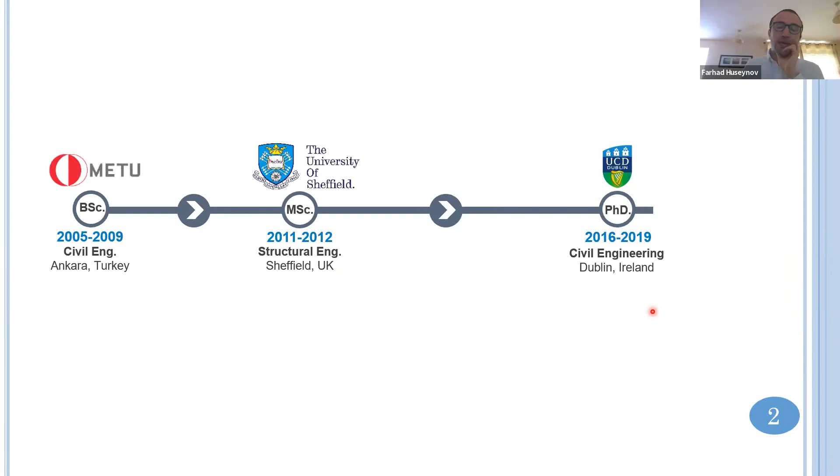I did research on bridge SHM under the supervision of Professor Eugene O'Brien. While doing my PhD at UCD, I was also working for a small university spin-out company named Full Scale Dynamics in Exeter, UK. FSDL is owned by three professors from the University of Exeter: James Brownjohn, Paul Reynolds, and Alex Pavic, and it's specialized in testing, monitoring and assessment of large full-scale structures.

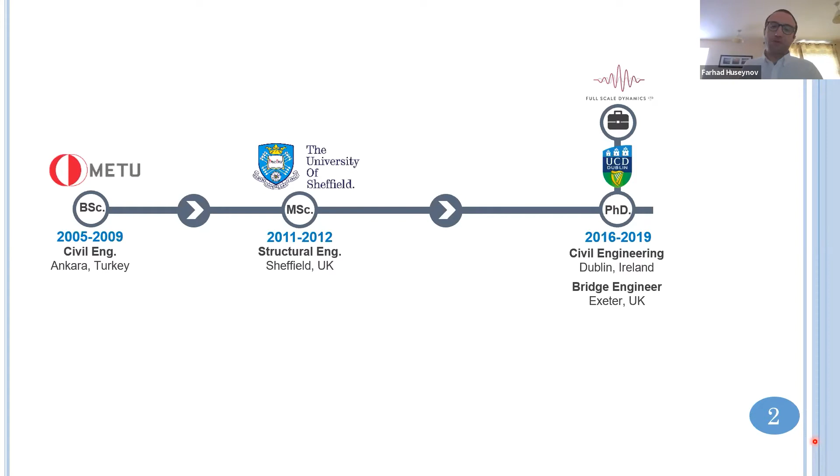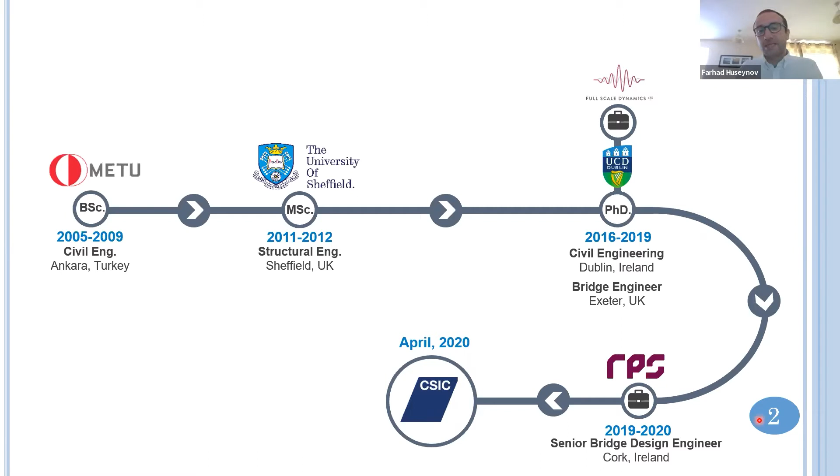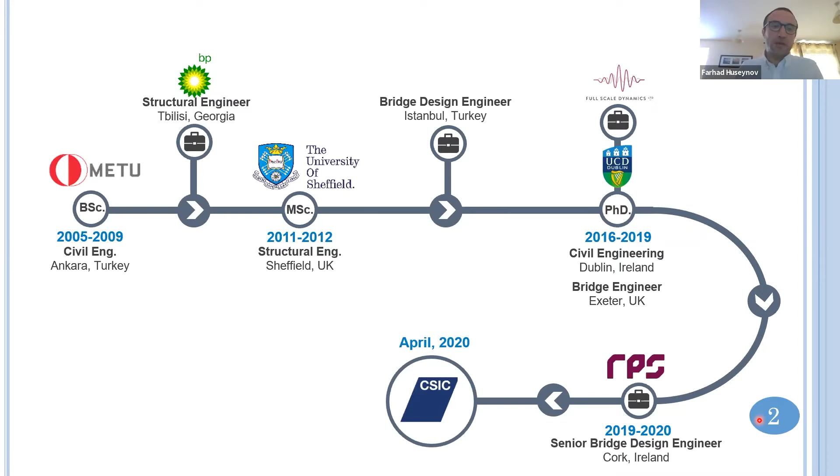The emphasis of my role was basically to carry out field tests on bridges in the UK and in Ireland. Before joining CSIC, I was working for a consultancy company named RPS as a senior bridge design engineer in Cork. Previously I worked for several engineering companies as a design engineer in Georgia and in Turkey. Overall, I have 8 years of experience in design, testing, and assessment of bridges.

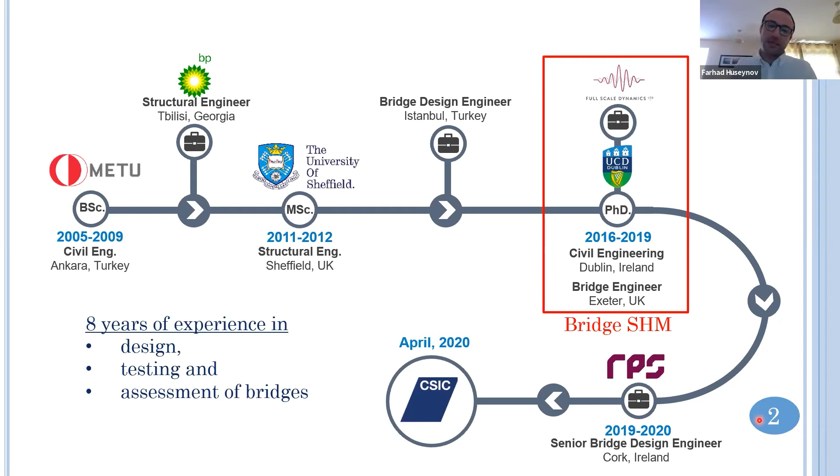Today I would like to talk about my bridge SHM experience through my PhD studies and during my employment at FSDL.

First, some background information on my PhD research area, and I would like to discuss its primary objective. I conducted research on bridge SHM methods.

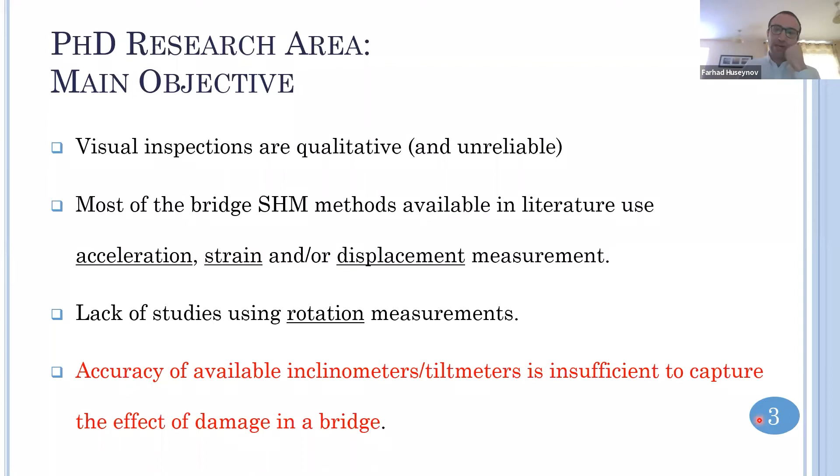Most of the bridge structural health monitoring techniques available in literature use either acceleration, strain, or displacement measurements to assess the condition of a bridge. There's a lack of study using rotation measurements, because the accuracy of commercially available inclinometers is not good enough to capture the effect of damage in a bridge, which was the main motivation behind my research area. So I started working on bridge condition assessment methods using rotation measurements under the supervision of Professor Eugene O'Brien.

To give some background theory on the research area I worked on during my PhD: it's based on elastic beam theory. The change in slope between any two points on the elastic curve equals the area under the curvature diagram, or M/EI diagram, between these points.

So in theory, when damage occurs anywhere on the bridge, a rotation sensor should be able to capture its effect. But the main research question I was working on is whether it will be possible to separate the effect of damage from the entire rotation signal. And if so, is it possible to measure the tiny rotations occurring on a bridge? And what's the required accuracy to detect the effect of damage on the bridge?

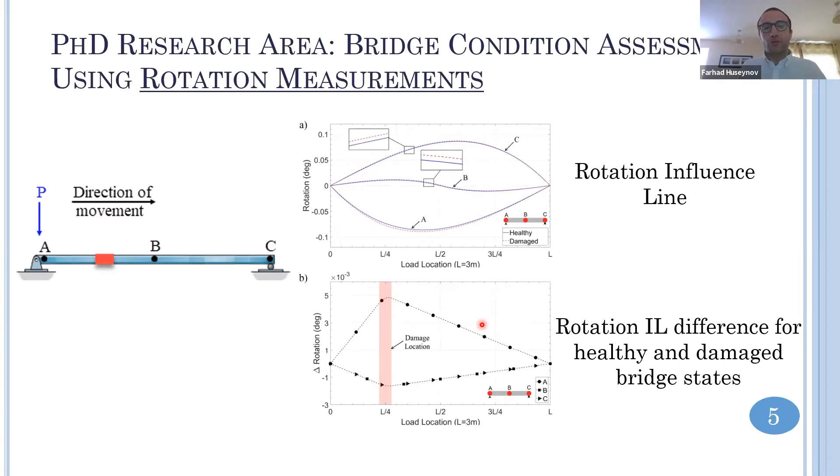The solid blue line represents the healthy state, and the dashed lines correspond to the damaged state. The difference between the rotation influence lines is provided in the bottom plot. As can be seen, the peak occurs at the location where the point load is at the damage location, and this comes from the curvature plot. As the load gets closer to the damage location, the effect of damage becomes more visible.

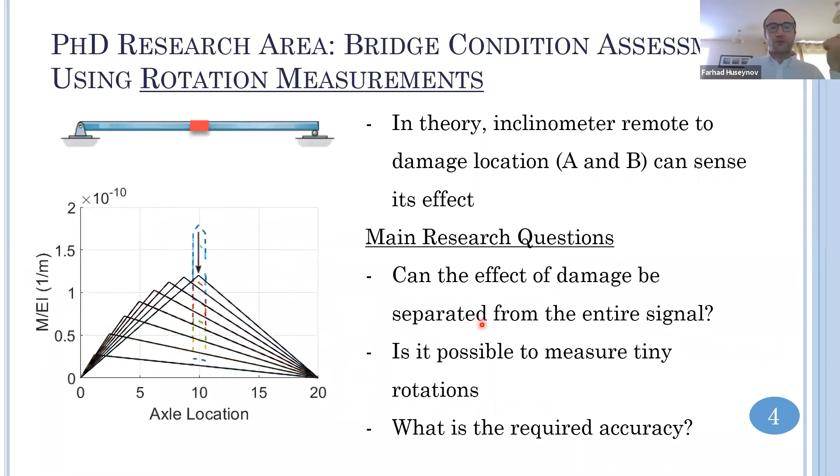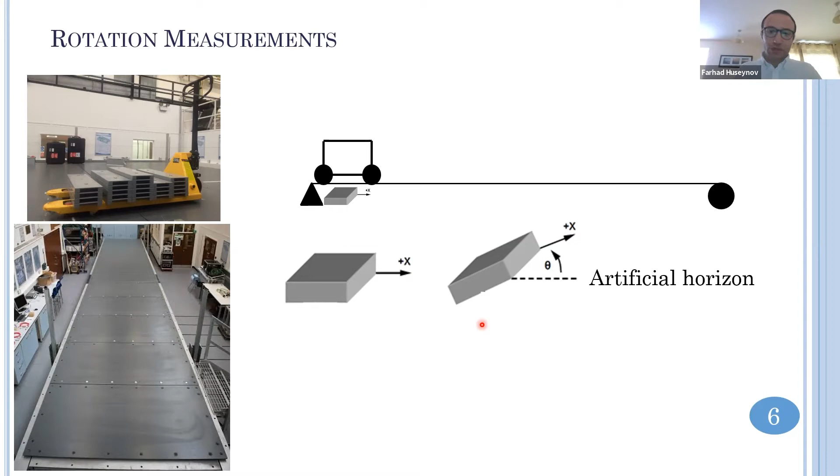The most challenging part of my PhD research was to get accurate rotation measurements. The main operating principle of an inclinometer is to measure the angular rotation of a test specimen with respect to an artificial horizon. In my research, I used accelerometers that sense gravity, the natural reference for the horizon, to measure rotation.

The output of an accelerometer obeys a sinusoidal relationship. When placed horizontally, it measures 0g. As it's rotated 360 degrees, if it points upwards it measures 1g, back to 0g, then minus g, and then back to 0g again.

In theory, the inverse sine function of the acceleration output should give rotation in radians. That's basically what I tried to test on a laboratory bridge at Exeter University, where I loaded the bridge with 500 kilograms using a trolley.

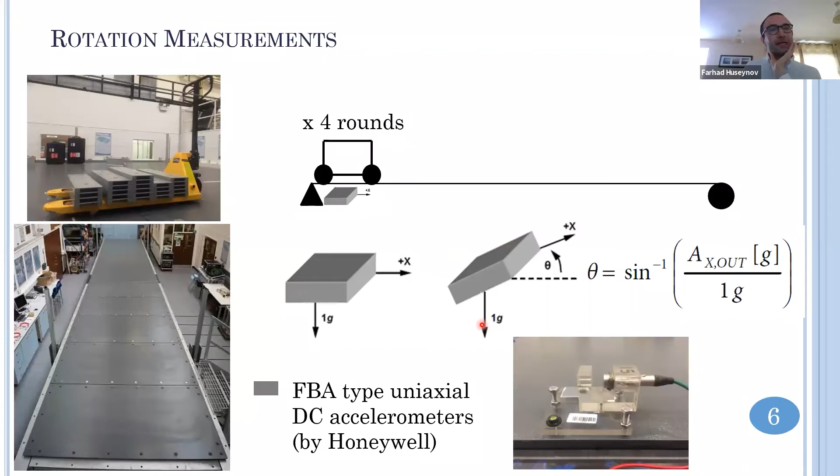I pushed the trolley along the bridge four times, and the next plot shows the raw horizontal acceleration signal I obtained during the test. I forgot to mention that I placed the accelerometers in the horizontal direction.

The raw acceleration signal has a high frequency component, which I later found out is due to the longitudinal movement of the deck from flexural bending. As the deck bends, it shortens and elongates, so the accelerometer senses that horizontal acceleration. I developed signal processing techniques to remove that high frequency content from the total response, and the final result, shown in the bottom plot, is the rotation.

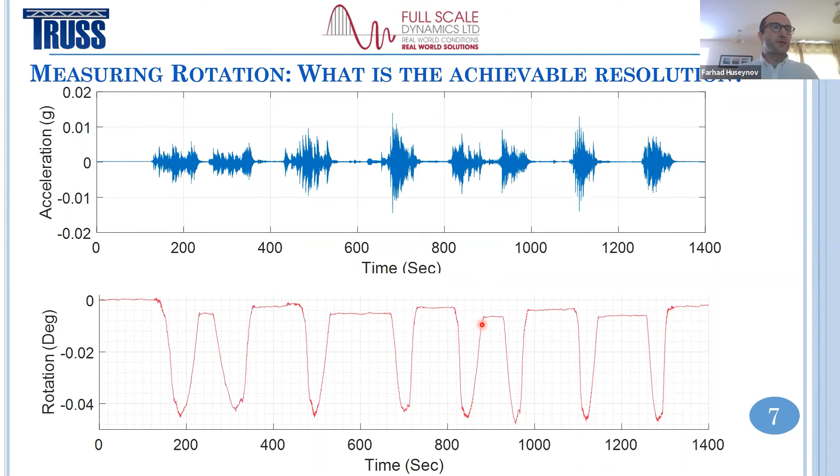This is how I measured the rotation response of a bridge to a moving trolley.

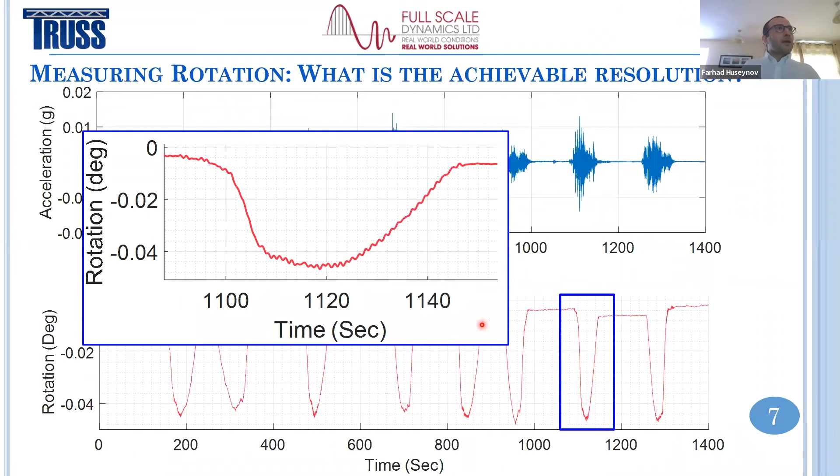The first case study I'd like to present - the main purpose was to test the damage detection methodology I developed throughout my PhD studies. I developed it through numerical studies, and tested the methodology in a laboratory at Exeter University as a final validation.

I got a chance to test the proposed bridge damage detection methodology on a real bridge owned by West Somerset Railway. Through FSDL, full-scale dynamics, I did numerous field tests on their bridges, which helped me build a strong relationship with the bridge owner, and as a result he allowed me to test the methodology on the bridge.

It's a relatively simple bridge, actually the most simplistic bridge I've ever come across. It consists of two main girders, and it doesn't have any railway ballast or concrete deck. The railway lines sit directly on top of the main girders.

The conventional trains running on the West Somerset Railway, since it's a heritage railway, are steam trains. There should be a video image showing a steam train crossing over the bridge.

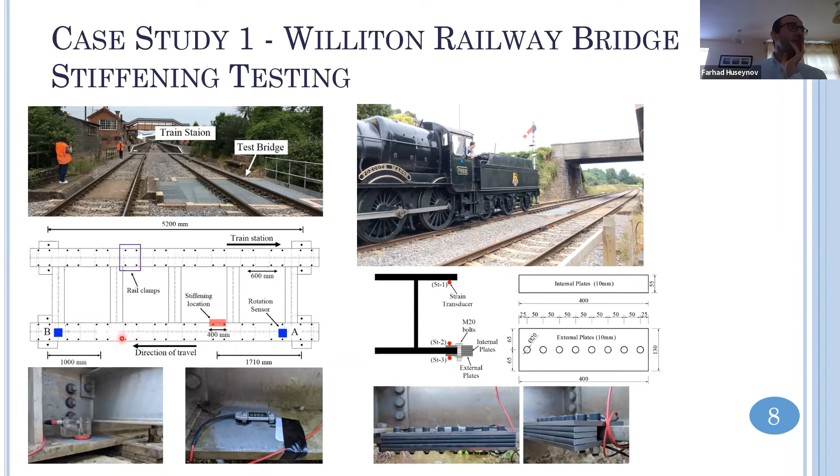I stiffened the bridge using steel plates, clamped at the bottom flange of the main girders using high tension grip bolts, and placed strain sensors on the main girder flanges and on the top and bottom of the steel plates to test if the stiffening application was effective. At the same time, I instrumented the bridge with accelerometers to measure rotation.

During the test, I asked the train operator to stop on the bridge to test if the stiffening application was effective. It shows the Raveningham Hall steam locomotive remaining stationary on the bridge, where we recorded strain at 3 locations. The aim was to see if full shear transfer is provided between the stiffening plates and the main girder, and to see if we will be able to get a nice linear strain distribution along the depth of the section, which is quite linear, and it worked.

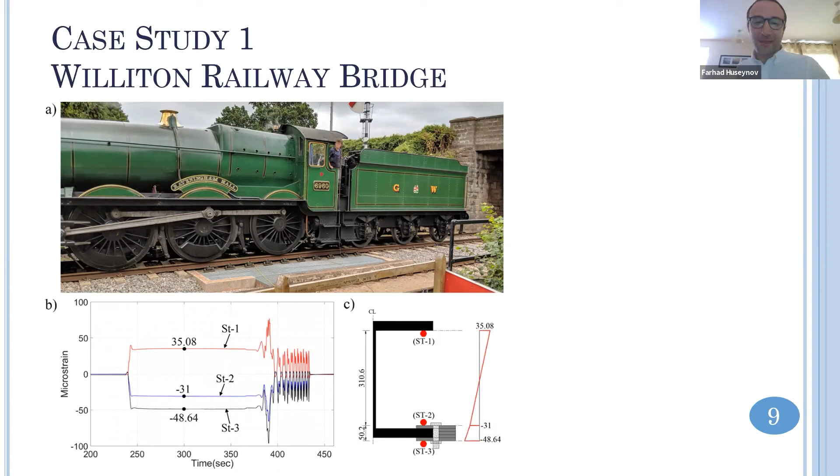I was very pleased seeing the stiffening application worked. Otherwise, if the plate slipped during the train loading, I would probably have a bigger problem than trying to finish my PhD, as the main girders have galvanized coating. I was lucky enough that there wasn't any issue, there wasn't any damage actually caused to the bridge.

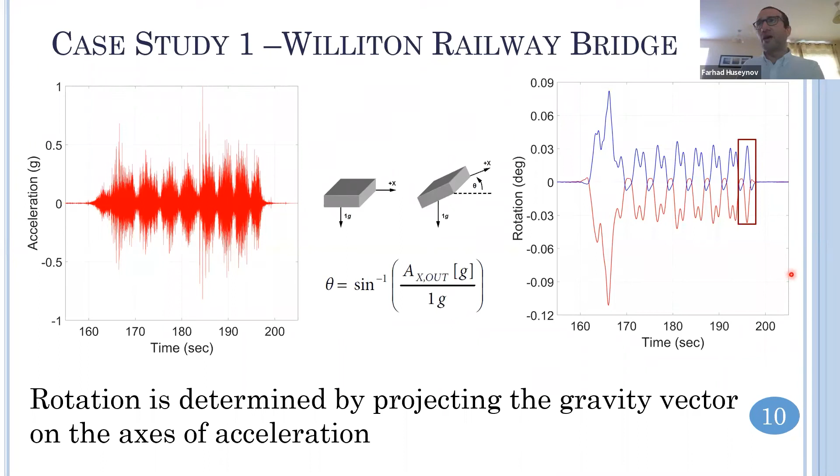There are some techniques available in literature to separate the contribution of each axle from the total response that I used throughout my PhD. The one that I used was developed by Professor Eugene O'Brien.

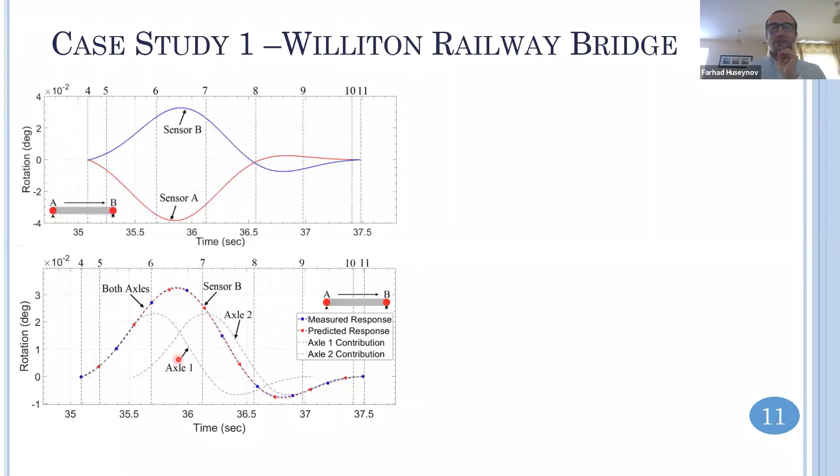The figure on the bottom shows the total response from one sensor to a moving bogie, and this dashed grey line shows the contribution of each axle. Since the weight distribution in a bogie is evenly distributed, the contribution of each axle is the same.

I did this for healthy and stiffened bridge cases. The continuous line shows the measurements obtained for the reference bridge state, which is the healthy, assumed to be healthy state, and the dashed red lines correspond with the stiffened bridge case.

Since in this bridge the rail tracks lay on top of the main girders, we noticed that the sensors start picking up the rotations way before the axles arrive at the support location. That's why the influence line of the bridge is much longer than the bridge itself.

The difference between the rotation influence lines obtained from sensor A is provided in the bottom right plot, where it shows this nice triangular shape which corresponds with the stiffening location, basically showing that the damage detection methodology worked on a real bridge.

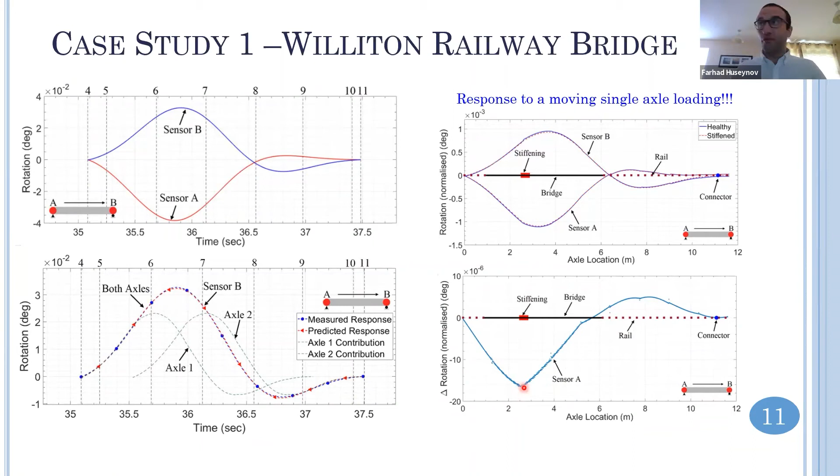The second case study that I would like to present was conducted again on one of these West Somerset Railway bridges. It's a simply supported railway bridge. The structural configuration is slightly similar to one of the Staffordshire bridges, where it has a high skew and consists of two main girders. The only difference is that this bridge is quite historical. It's built in the 1870s, so the main girder is made of wrought iron.

The purpose of the test was that West Somerset Railway approached FSTL in summer 2017. They were hosting this famous locomotive, Flying Scotsman, which is heavier than the conventional train running on their line. This mineral line railway bridge experienced, the abutment of the bridge was experiencing some vertical cracks on one of its wing walls, and the video imaging here shows actually when the train was moving, it was possible with the bare eyes to see the wall movements due to the steam trains.

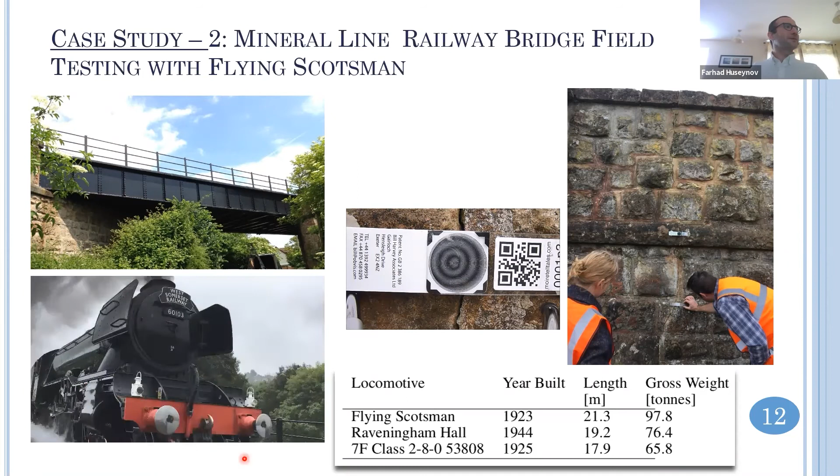Using this opportunity, the Flying Scotsman locomotive crossed the bridge. It was quite interesting to see that famous locomotive from very close. Using this opportunity, we did two tests, one in June 2017, a few months before the Flying Scotsman arrived.

The main reason was to see if the crack movement of the wing wall remained in the elastic range. So we compared the magnitude of crack movements for various trains, and the purpose was to see if it would remain in elastic range when the Flying Scotsman crossed the bridge.

Using this opportunity, I also installed some sensors at the deck level, purely for academic curiosity. I placed these accelerometers oriented in the horizontal direction to get rotation. The aim was to use these rotations and calculate the deflected shape of the deck using polynomial fitting approaches available in literature.

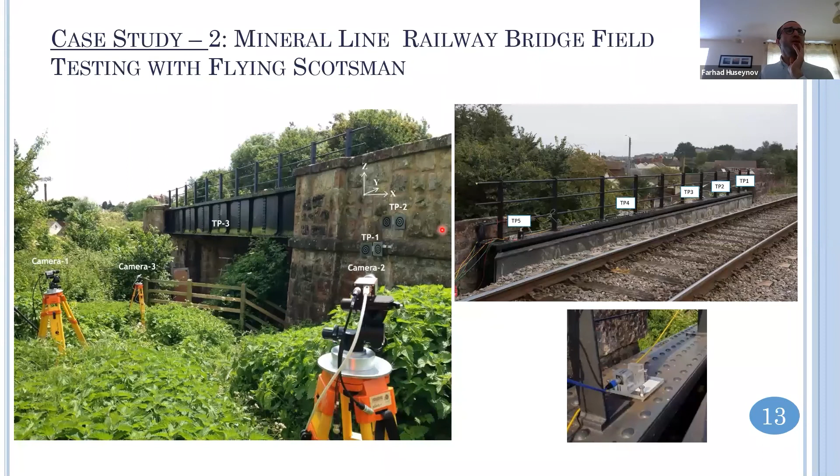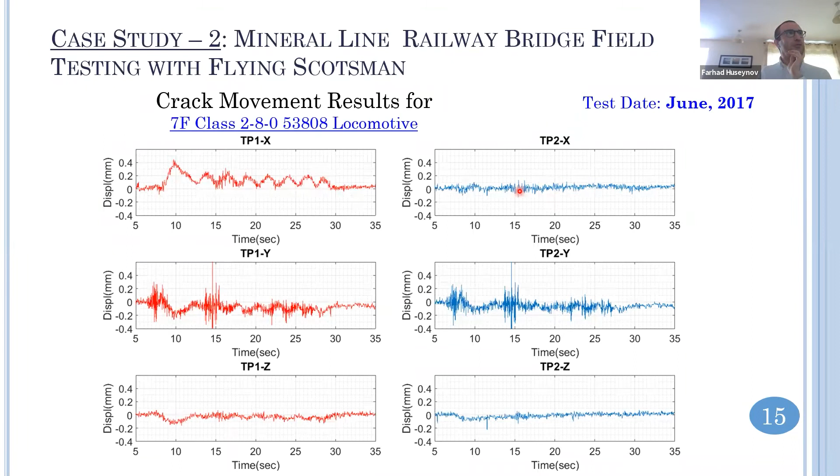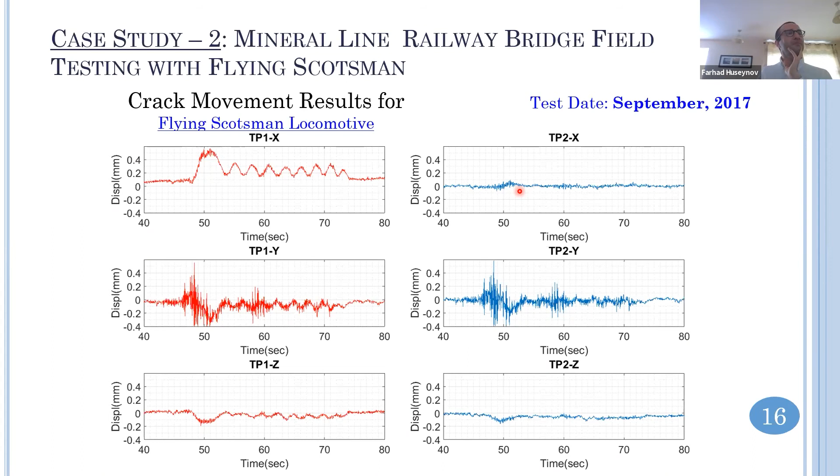The magnitude of movements wasn't significant enough. This plot is for the Raveningham Hall locomotive, and we obtained the same for the 7F class locomotive. During the Flying Scotsman crossing, the magnitude of movements didn't vary much, which ensured the safe passage of the locomotive.

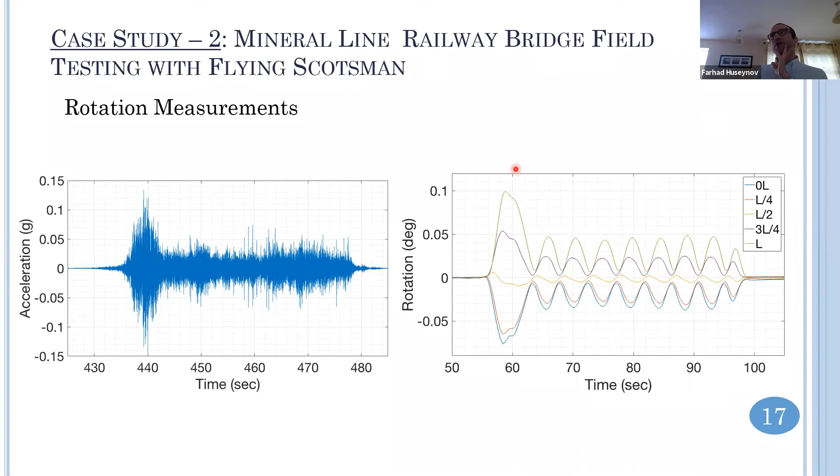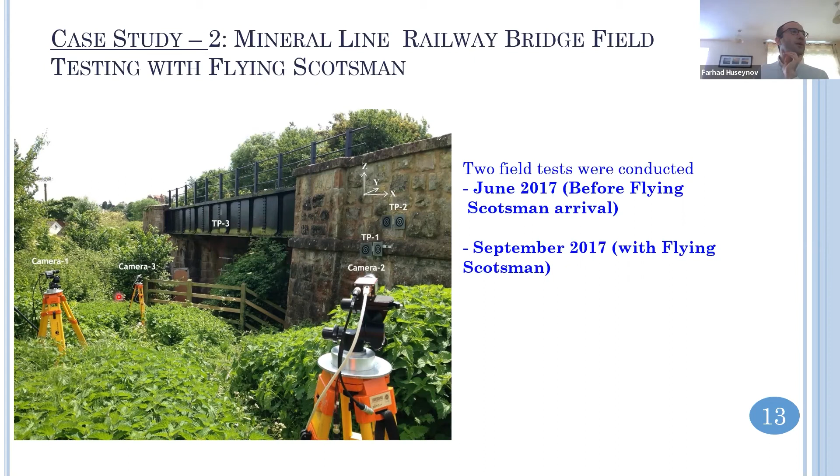I used this rotation data to calculate the deflected shape of the bridge. But at the same time, I forgot to mention, I attached some optical targets at the mid-span and quarter span locations, and this was monitored using the Imetrum cameras.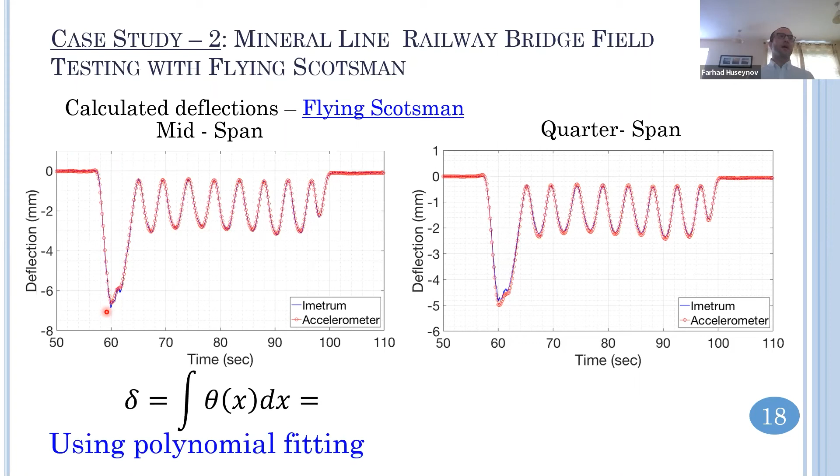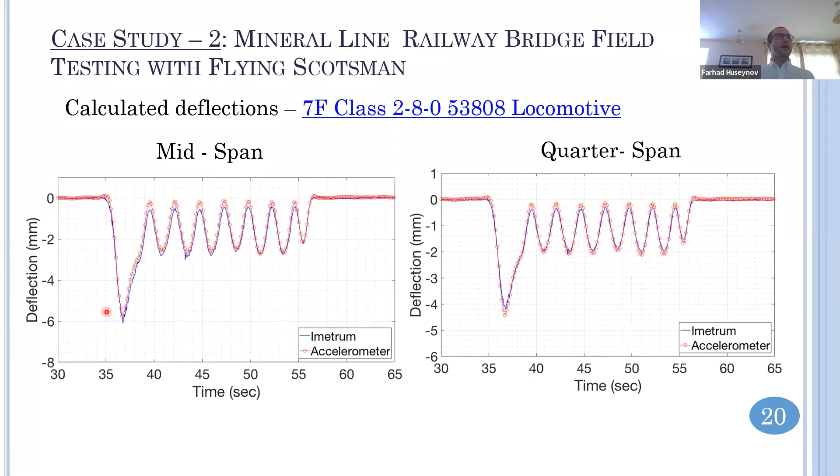The plot shows the mid-span and quarter span displacement time histories obtained from the Imetrum camera and from the polynomial fitting approach using accelerometer or rotation data. They show that the displacement obtained using polynomial fitting matches the Imetrum measurements quite well, with similar results for the Flying Scotsman passage and the other locomotive.

Now I would like to briefly introduce the project I started working on at CSIC. It's called Performance Monitoring of Infrastructure Using a Digital Twin. It's part of an ongoing project, the 3rd phase of a project that started in 2016, called Staffordshire Bridges Performance Monitoring Using Fiber Optic Sensors. Two bridges were instrumented using fiber optic sensors.

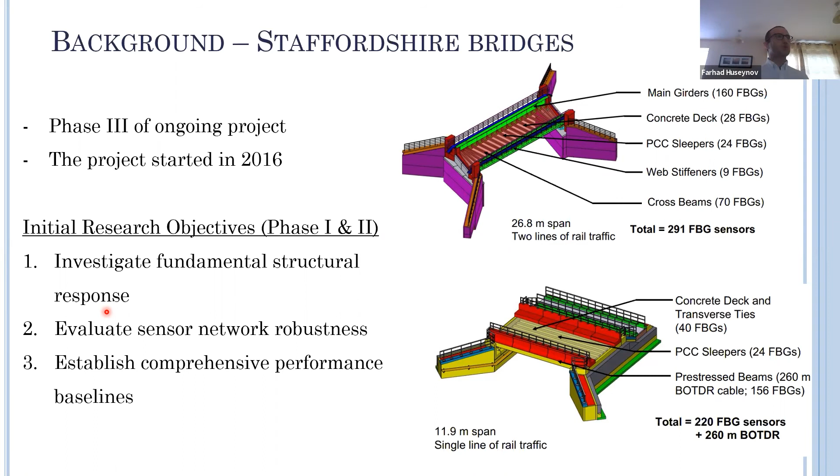One is a steel composite bridge, and the other is a pre-cast pre-stressed infill deck type bridge. The initial research objective in phase 1 and phase 2 was to investigate fundamental structural response, evaluate sensor network robustness, and establish a comprehensive performance baseline.

The main objective of the 3rd phase that I started working on is to showcase the use of real-time data analytics and integration with digital twins, translating all the monitoring data into information beneficial to bridge owners using digital twin technology.

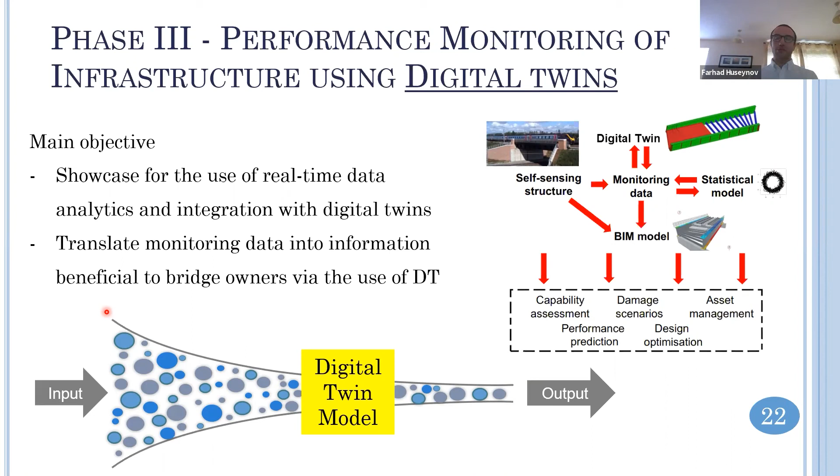I put some thought into what kind of information a bridge owner would expect from such structural health monitoring techniques, and what kind of information would be useful to integrate with a digital twin.

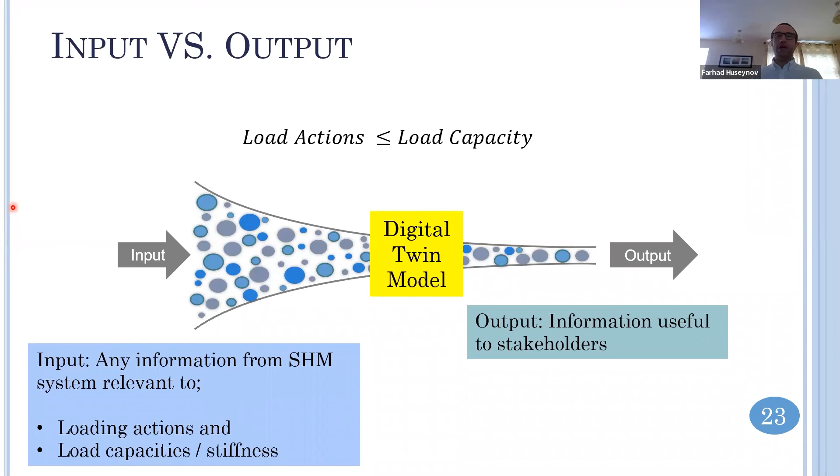The basic bridge design or bridge assessment criteria is to see that load actions are equal to or smaller than the load capacity of the structure. So any input relevant to bridge load conditions or relevant to the stiffness of the bridge, in other words load capacity, will be fed into the digital twin. The information from the digital twin will be something like whether the bridge is safe, and if so, what the load factor of the bridge is, and what the remaining service life of the bridge is, and so on.

I read some studies, all published and already available, on Staffordshire bridges, to familiarize myself with phase 1 and phase 2 of the project.

Basically, most of the available studies from the first two phases of the project mostly focus on permanent load actions, the effect of time-dependent load actions and material properties on structural performance, such as how creep and shrinkage affect the whole performance of the structure, and how the accurate representation of the permanent load distribution along the length of the bridge due to staged deck casting affected bridge performance, and then how the actual load distribution factors on the deck.

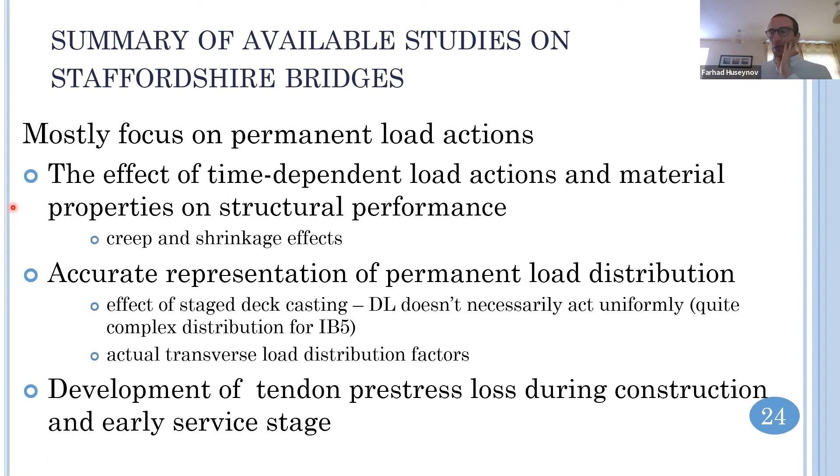I put some thoughts about what can be done further, and I realized that the available studies haven't really addressed the load actions due to live loading at the bridge site, as well as the boundary conditions. Although bridges such as this steel composite and pre-stressed precast bridge within the project are designed as simply supported, there is some degree of fixity that always exists because they rest on elastomeric bearings, which have a certain degree of fixity, and the accurate representation of such behavior could reveal significant strength reserve of the bridge.

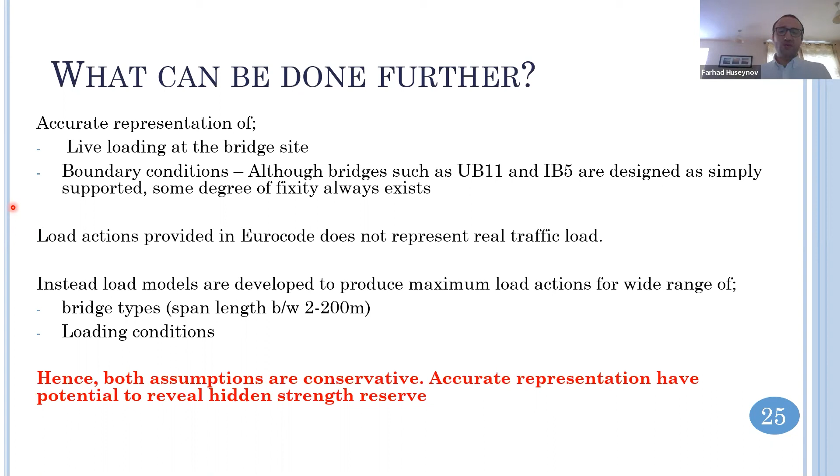Besides, the live load actions provided in Eurocode do not represent the real traffic loading. Instead, load models are developed to produce maximum load effects for a wide range of bridge types spanning from 2 meters to 200 meters, and a wide range of loading conditions. Hence both assumptions are conservative, and an accurate representation has the potential to reveal hidden strength reserve.

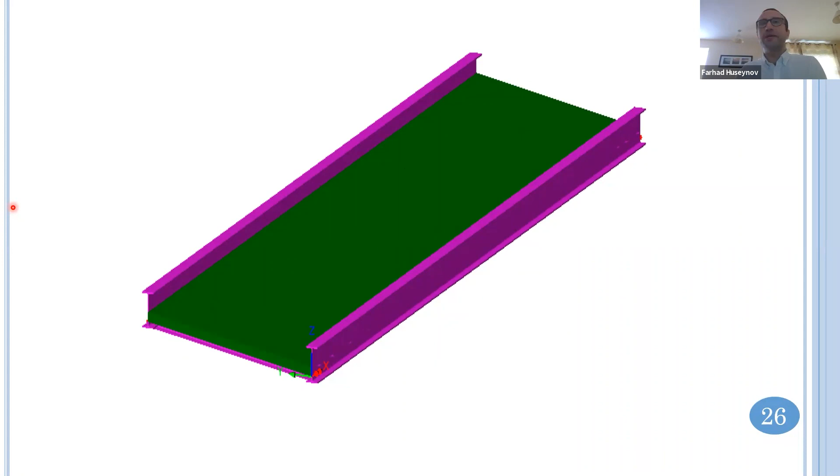That's what I started investigating, and this shows a very simplistic model of the IB5 bridge that I started working on. I have two ideas for how the live loading, the load actions of live loading, could be simulated using a digital twin.

The idea is, using bridge weigh-in-motion systems which use the strain response to calculate the axle weights of a traversing vehicle, to calculate the axle weights of the passing train, and then put those axle weights as a moving load into the digital twin to replicate the load actions due to moving trains. That's one idea, but the disadvantage of this method is that it requires an accurate axle detection system, which I'm still working on - various techniques for how the presence of an axle could be identified on the bridge.

The second method is, instead of using axle weights as an input into the digital twin, to put displacements at various locations along the length of the main girders as an input into an FE model.

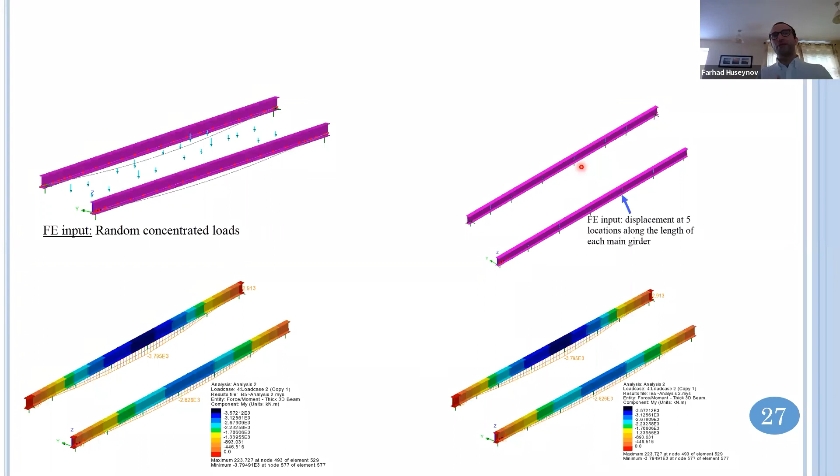So I did simulations of load actions causing these deformations, and then if you input those deformations into an FE model, they should generate the same load actions, and they did.

Which I'm planning to use further to investigate the realistic load actions due to train loading at the bridge site.